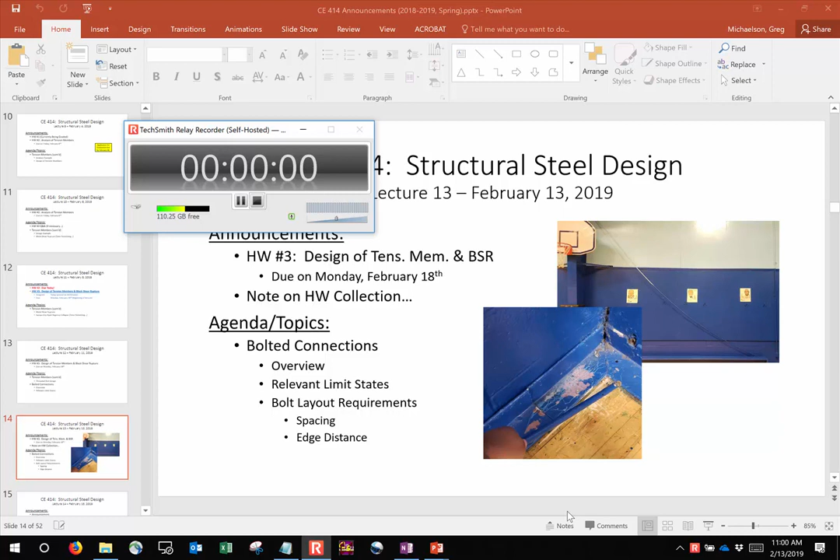All right, let's get started.

I have here some pictures that Mr. Fitzpatrick provided me. This is a threaded tension rod that is in a community center installation, and that is a pretty deflected rod. Because, I mean, just look at it. It's sort of, you know, that's me tracing it. Also, that's its connection. That's pretty interesting. No, that's the floor. Don't do that. That's all I'm saying.

In all seriousness, though, we were talking about it for this installation. It's actually probably fine because now that the structure's up, the concrete wall is probably taking a lot of that lateral load. But somebody should look at it. But yeah, I just figured you'd get a kick out of that.

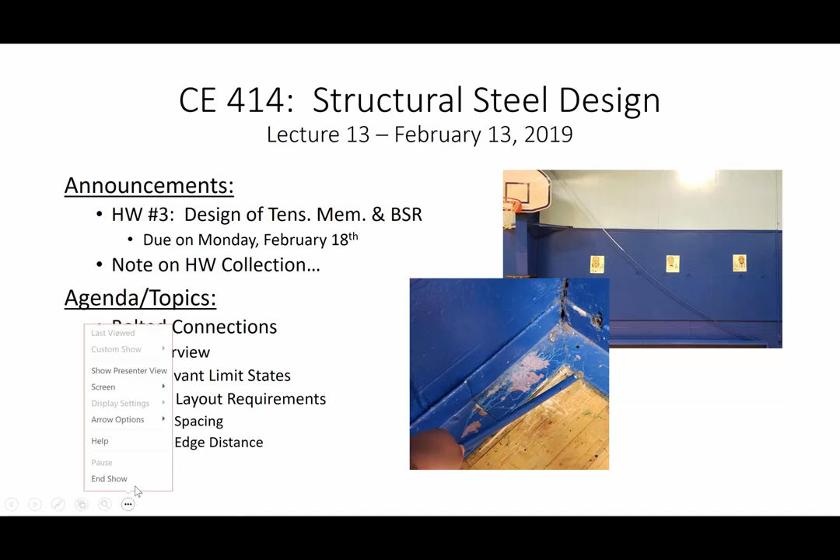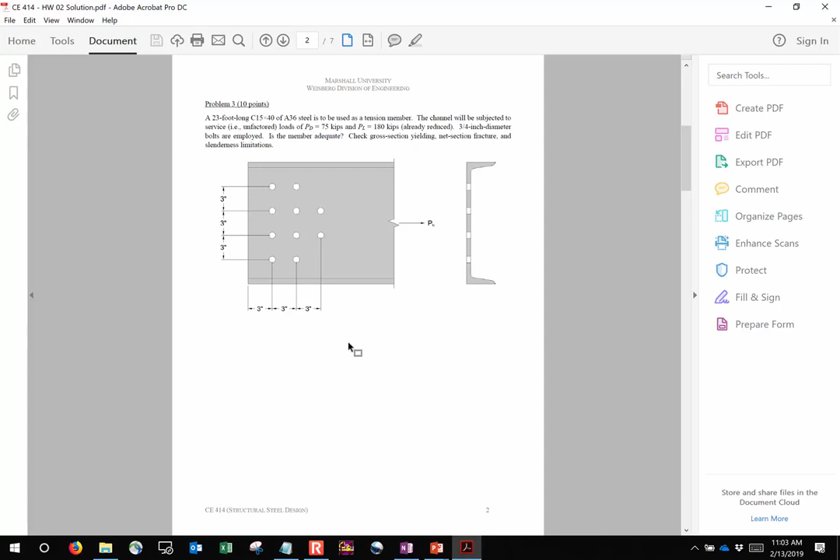I do have a couple things I wanted to mention on the assignment. All in all, I think y'all did pretty well, but a couple things are worth mentioning. Let's take, for instance, problem number 3. This is problem number 3, and we have a series of bolts in this channel. Let me ask you a question. Are they going through the flange, or are they going through the web? When you compute your net area, it's the web thickness, not the flange thickness, because the bolts are going through the web.

The reason I'm saying this is because there are going to be instances where the bolts are connected in a different fashion, where it's different, okay? What I don't want you to do is get into this mode of, this is what Dr. Michaelson did on example 2B. If I do this exact same thing on the homework assignment, I'll get 100, okay? I'm just doing that to help you all out, I'm not trying to be a jerk or anything. I know this is the first time you've seen a lot of this stuff. I just want to make sure you're paying attention to this stuff, okay? This is just a for instance. Like I said, by and large, you all did great. I just wanted to point out stuff like that, okay?

Because I know in this class, it's really easy to go, oh, the net area is this minus 4 DHTF. But it's not TF, because they're not going through the flange, they're going through the web. So everybody okay with that? That's just an instance. I have the solution posted. I'll have the hard copies on the cart outside my office after class. You all can grab them at your convenience. Sound good? Any questions?

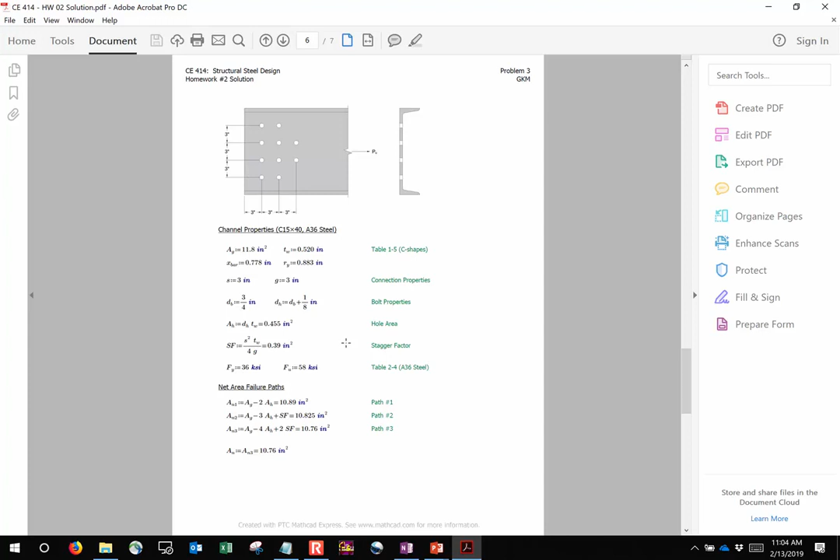Now, keep in mind, in lecture we're in exam 2 mode. We're talking about bolted connections. So I'm going to get back into it.

Last time we concluded our discussion on threaded rods and started talking about bolted connections. We're taking it a limit state at a time, and we're also going to look at bolt spacing and layout requirements here in a little bit. And if we have time, we might get into our first bolted connection example.

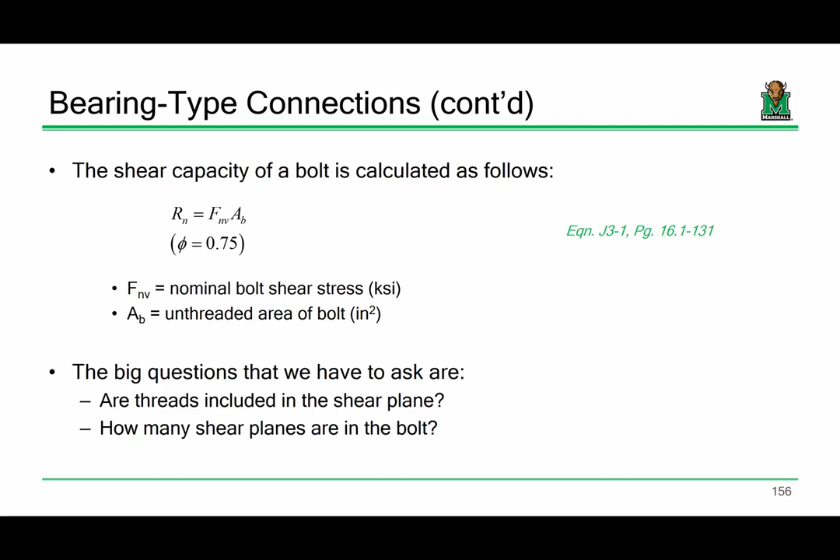We left last time by discussing the concept of bolt shear, the idea of a bolt essentially shearing in half. Our governing equation is just the nominal shear capacity times the area, with a phi value of 0.75. Fortunately, we don't really have to use this equation much because we have table 7.1. But I wanted to recap this and discuss the two primary issues to make sure everybody's clear.

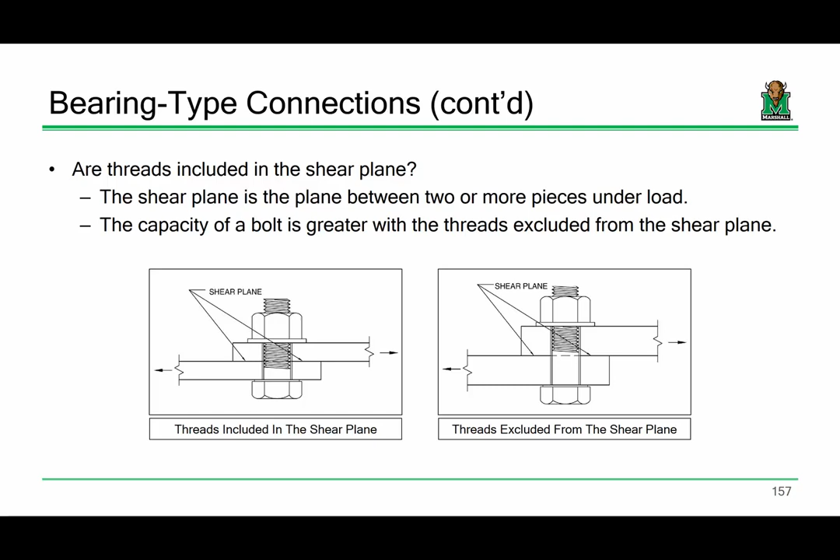The two primary issues associated with determining the shear capacity of a bolt: number one, whether or not the threads are included in the shear plane. If you don't know, what do you assume? That they are included. Obviously, if you're shearing through the threads, you're shearing through less bolt, so the bolt capacity is going to be lowered. When in doubt, make a conservative assumption, and the nominal shear capacities reflect that accordingly.

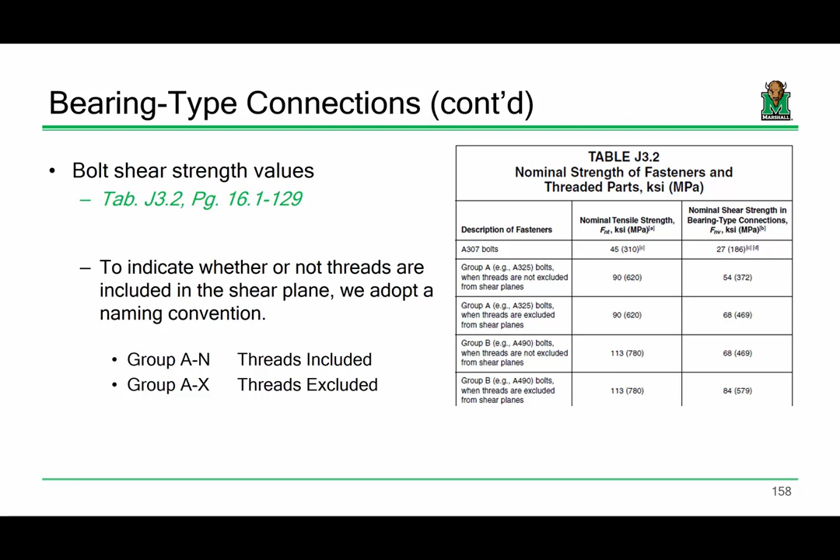Don't forget the naming convention. If I say group A-N, that means threads included. Group A-X means threads excluded. The second thing we have to ask is whether or not the connection is in a single shear or double shear scenario.

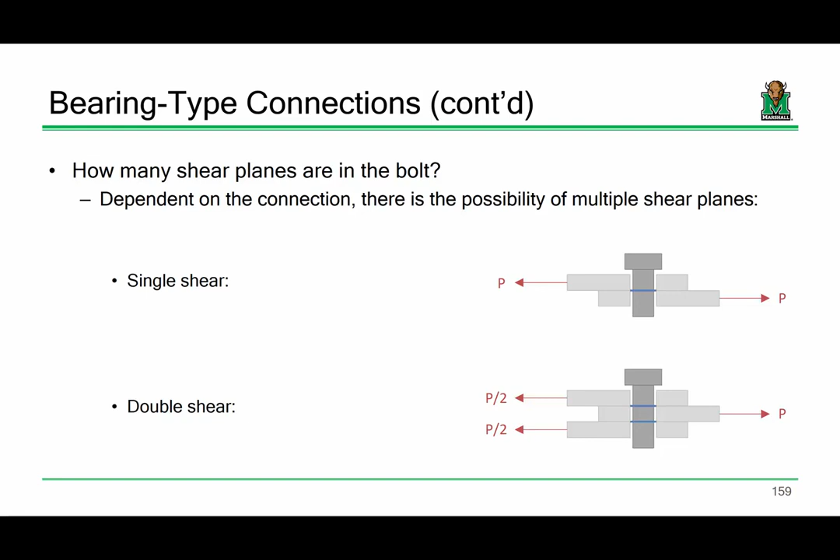If it's in double shear, the bolt is twice as strong, not because the bolt magically got stronger, but because you have to shear through more bolt in order to fail it. So anytime you look at a double shear capacity, the capacity is double that of single shear.

And like I said, we don't have to do a lot of this math because table 7.1 does it for us. So table 7.1 reports bolt shear capacities for single shear and double shear scenarios, for threads included and threads excluded scenarios, for group A and group B, and for various bolt diameters that we're interested in. It does report in ASD and LRFD, but we're not utilizing ASD, so we're only using the blue numbers.

Another thing worth pointing out: if you turn the page in that section of the manual, there are a number of design aids that are pretty useful. For instance, the next page reports slip capacity, which we're going to look at a little bit later. The page on the right reports tensile capacity of bolts. You'll notice that table is a bit smaller because whether the shear planes are there, single or double shear, threads included or excluded, doesn't matter since we're not applying shear, we're applying tension. So all that matters is really the diameter. Pretty simple.

Everybody good? All right, now this is where we left off last time, so I want to elaborate on this topic a little bit. Last time we were looking at failure of the bolt. Now let's look at the failure of the plate.

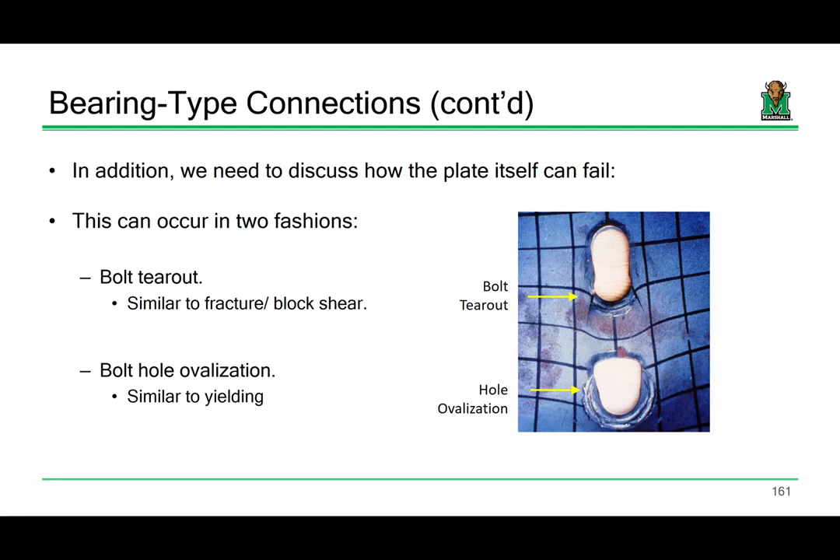Now I'll go ahead and forewarn you, there are different LsubC values whether you're looking at a bolt on the edge of the plate or a bolt within the interior of the connection. Because of that, you're going to have a different nominal capacity for edge bolts than for interior bolts. So you have to do this calculation twice, and then you sum up the capacities to get the total Rn for your connection.

Now phi is 0.75. If you look this equation up in the spec, there are different expressions depending on whether or not you're considering deformation at the service load. We are going to consider that to be important, because to be honest, I really think it's important to ensure that your connection geometry remains consistent. Unless otherwise noted, any structural engineer is going to do that as well.

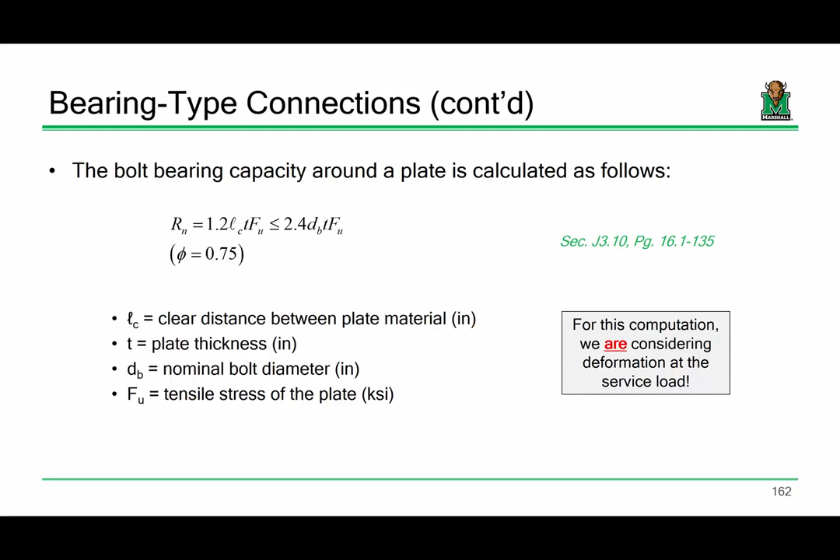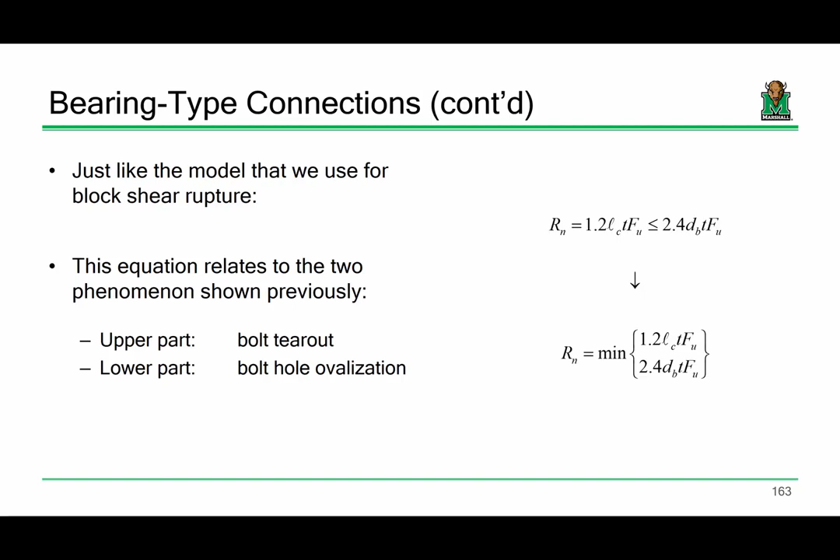Everybody good? All right, like I said, we can write that as the minimum of these two expressions, and it's kind of nice the way the equation is written, because basically this pile is less than or equal to this other pile, where it's the minimum of those two values. Each of those two expressions refers to a given effect. So that 1.2 LctFu is the one that relates to the tear out, to the edges of the plate ripping. And the 2.4 dbtFu, that's the ovalization, the plastification of the bolt hole. So each equation relates to that particular effect, and the minimum one governs. It's saying whichever one's going to happen first is going to be the governing capacity of that given bolt. So everybody good? All right.

Now, the term that's new, the term that's unique, is this term LsubC. I haven't really talked about LsubC yet, so I want to take some time and define it. LsubC is defined as the clear distance between the edge of one bolt hole and either the edge of the other bolt hole or the edge of the plate. This image describes it pretty well. I have a bolted connection with two bolts in it, just for simplification, and a tensile load applied upward. The bolts are going to be bearing on this end, so we're talking about the plate failing in this direction.

So LsubC, if you want a simple definition, is a clear distance, a distance from edge to edge. I'm going to introduce a couple of terms. This term S is the bolt spacing. I'm using the same terminology that we use for stagger factors. Remember, S was along the direction of loading, from center of bolt to center of bolt. And L sub e, this is a new term, is the edge distance. This is from that last bolt towards the edge of the plate to the clear edge. Everybody good?

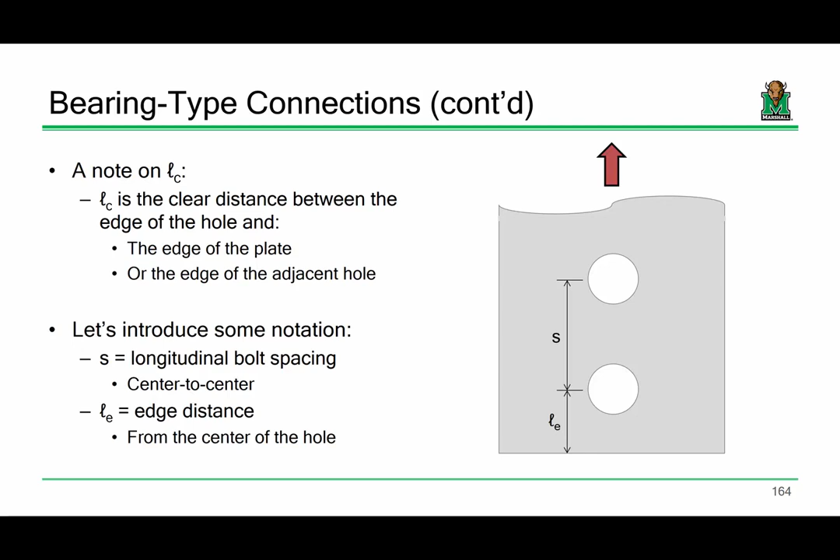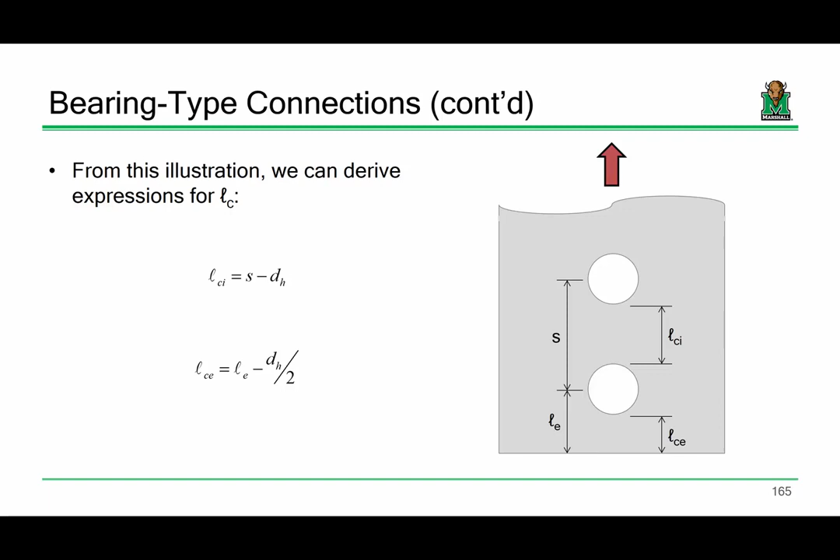Okay. Now we're talking about clear distance. If those are the spacing and the edge distance, these are the LsubC values. Because of your connection geometry, you're going to have two different LsubC values: one for your interior bolts and one for your edge bolts. This bolt is going to want to fail down here, so this is the clear edge distance that we're after. And this bolt is going to want to rip down this way, so this is the clear distance that we're after. For the bolts on that far edge, the LsubC value, which I'm calling LsubCe, is the edge distance minus half a hole diameter. For the interior bolts, it's the bolt spacing, then we come in half a hole diameter and another half a hole diameter, so a single hole diameter. So we have S minus d_h for the interior bolts, and for the edge bolts, it's the edge distance minus half a hole diameter. Everybody okay with that? Any questions?

All right. Now, if you can understand that, I think the computation of the capacity is pretty easy. Like I said, that first equation relates to bolt tear out. If you look at the expression, it's pretty easy to derive. This first expression, 1.2 LctFu, is kind of like a mini block shear check. If you were to think about this in block shear terms, what would be the area along this section? Well, it'd be the length times the thickness, right?

And in order to get a capacity, that's the area, so we would multiply it by some limiting stress, so we'd call it FU, but because it's in shear, we multiply it by 0.6, okay? But here's the thing, there's two of them, because there's one here and there's one there. So we take that whole thing and we multiply it by 2. So that's how you get 1.2 LsubC TFU. So there's really not a whole lot of magic or mystery to that expression. It's just making your life a little easier by doing this sort of mini block shear check, okay?

Everybody okay with that? Now, this one you can't derive. That's just empirical, okay? That's just monitoring, doing testing and figuring out a simple value that fits the test data. So there's no really super way you can derive that, or super accurate way, I should say. Everybody good?

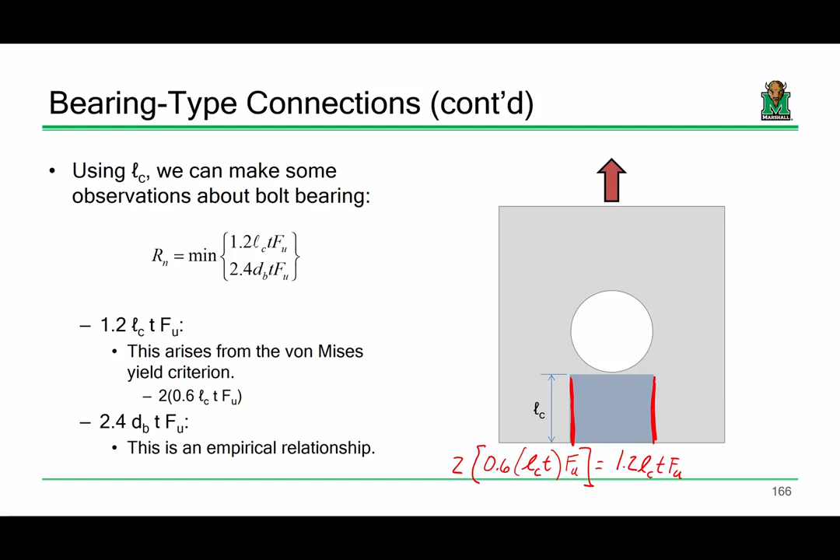So if you look at this expression, notice how there are some terms that are common. So one of the things I can do is factor these out. I can factor out the T and the FU, and I can actually factor out a 1.2 and make this expression a whole lot more user-friendly. I am sorry for another note on this slide, because you're not going to like me very much. Here's the thing. When we do bolt bearing computations, we are actually evaluating the physical dimensions of the hole. We're actually looking at the hole as it is and computing its capacity.

Let's go back to tension members. How do you determine the diameter of the hole? You add 1/8 of an inch, but why do you add 1/8 of an inch? We added a 1/16 twice, right? Now why did we add, let's pop quiz. Give me the reasons why we added those 16ths. There were 2 reasons. We added 1/16 for one reason and 1/16 for another. Okay, so one of them was erection tolerance. So you actually had to drill the hole a little bit larger to fit the bolt in. What was the other one?

But let's talk about that damaged material check. What we were saying is that little bit of ring of material, how effective is it in transferring stress to the entire member? Okay? All right? So that was sort of an analytical add-on that we did for the tension member evaluation. We're not looking at tension members right now. We're looking at the physical dimensions of the hole. So when you're doing a bolted connection bolt bearing check, you don't add 1/8 of an inch. You add a 1/16 of an inch. So, like I said, I hope you don't hate me too much, but that's just steel design. So, any questions on that? Again, we're actually evaluating the physical dimensions of the hole, and the actual hole is a 1/16 of an inch larger, not 1/8.

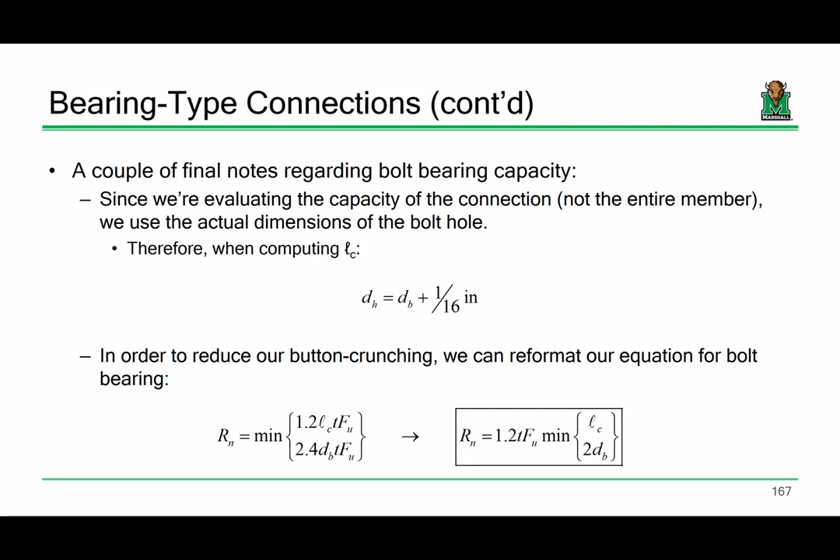Before we start getting into example mode and capacity mode, we got another big question that we need to answer. And I got this question, I think, a few lectures ago, and I said, we'll get to it. Well, now we've gotten to it. And the question was, why are the bolts spaced at 4 inches? Why aren't they 3? Why aren't they 2? How do you figure out how far the bolts are from each other or from the edge? That's what we're going to do now.

So one of the things that you need to be able to determine when you're designing a connection, I think it's pretty easy to determine the required number of bolts. You got 100 kips on a connection. Each bolt can hold up 20 kips. How many bolts do you need? 5, right? Just 100 over 20. That's pretty easy. But what we haven't answered yet is, okay, you got 5 bolts. What do you do, just put them wherever? Now, how do you lay them out? How do you properly detail a connection?

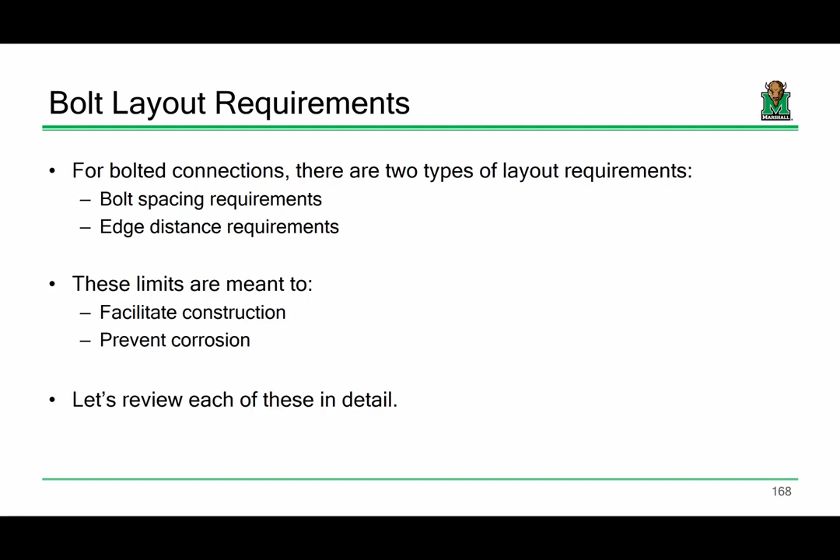And so what we really have to address are 2 requirements. We have to address bolt spacing requirements, how far apart bolts should be spaced from each other, and edge distance requirements, how far bolts can be from the edge. Now, if you want the general reason why these limits are even there in the first place, there's 2 reasons. One, they're meant to facilitate construction and to prevent corrosion. And that'll become clear here in a second. So let's take each of these one at a time.

So first off, we should be looking through Chapter J. So I want everybody to grab this lovely steel manual. Let's go to Chapter J. We're on 16.1-130. Has everybody brought their AISC Steel Construction Manual, 15th edition, the one with the turquoise blue cover, right?

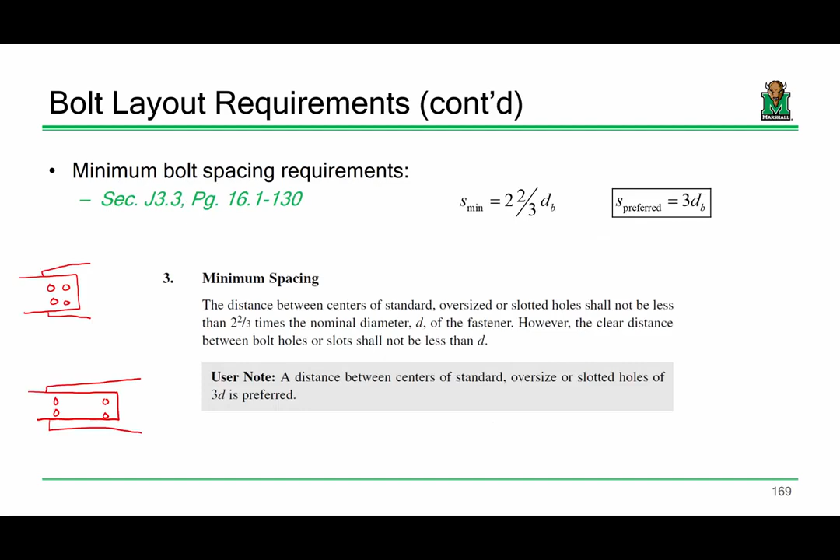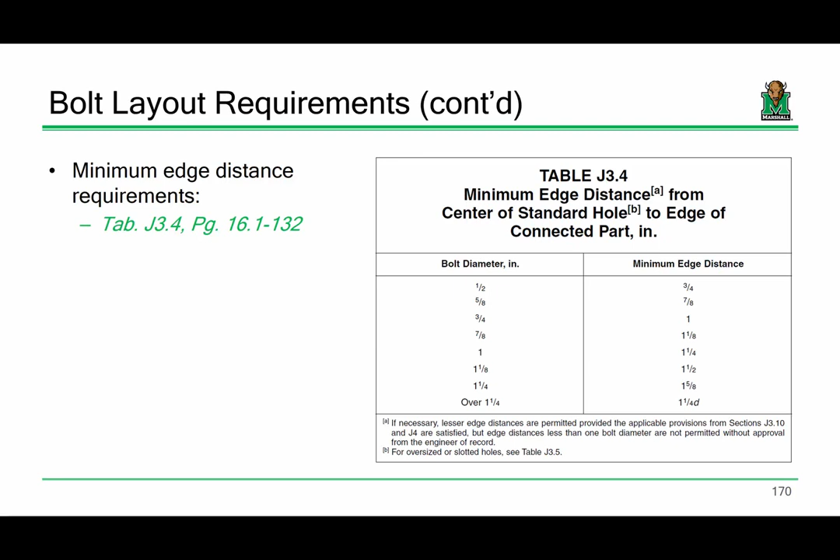And so this is a lookup. This would be the minimum spacing requirement, and this is the minimum edge distance requirement—how far the bolts are from the edge. Again, this is independent of the loading direction. It doesn't matter, we're not talking about loading at this point, we're just talking about fabrication. As for maximum spacing and edge distance—for edge distance there's just a single limit: it's either 12 times the thickness or 6 inches. And that's just a corrosion issue.

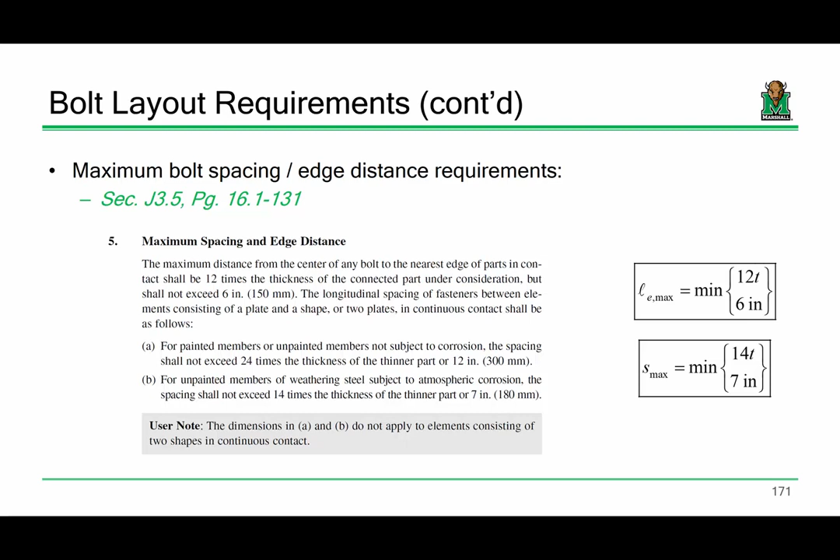However, for spacing, it's a little more refined. The spacing limit on the maximum side is a function of your coating option. So for instance, if you have an unpainted member, the limits are a little more stringent, whereas if you have a painted member, you're allowed a little more flexibility. However, honestly, in most real-world connection applications, if you're connecting member A to member B, that's not an issue—usually you'll be able to detail a connection and not have to worry about S-max. The only time S-max becomes a real big issue is if you have a bolted cover plate on a beam. Then you really are wanting to try and use as few bolts as possible, so you're wanting to space them out. But that's a pretty rare application.

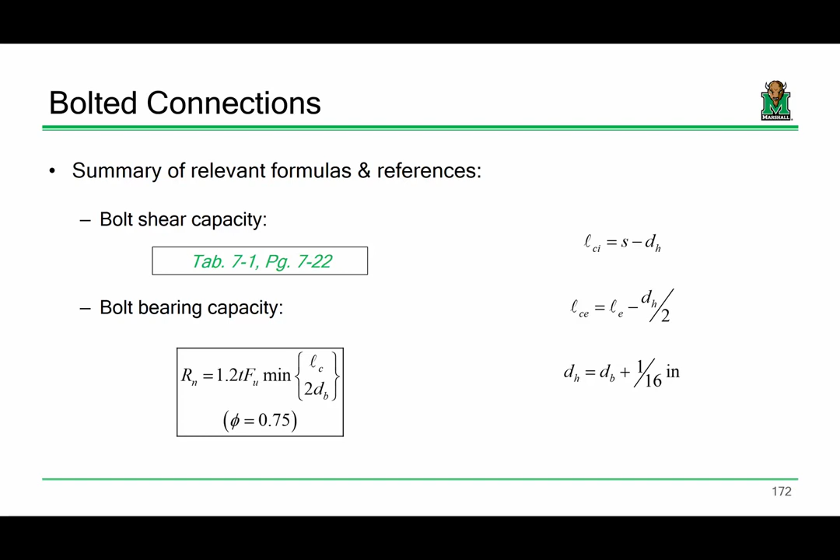And then how do you get the hole diameter? It's the diameter of a bolt plus a 1/16 of an inch, not an eighth. And your phi value is 0.75. As for layouts, we have bolt spacing requirements. We have S min and S preferred. This is S max. If you're evaluating a connection, just use S min and S max because the connection is what it is, so does it meet minimum and maximum requirements? Edge distance, it's just min and max. So pretty straightforward. Any questions?

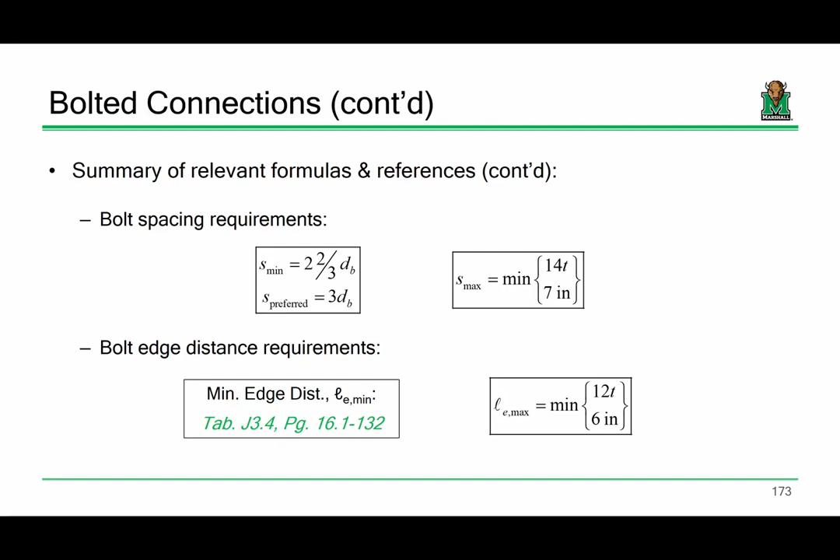That's a good question. I generally just put a tab right in chapter J3 because there's a lot of different tables here worth checking. But that's what I did. It's not totally necessary because you could just write that stuff out on a formula sheet, but I think you should have something there.

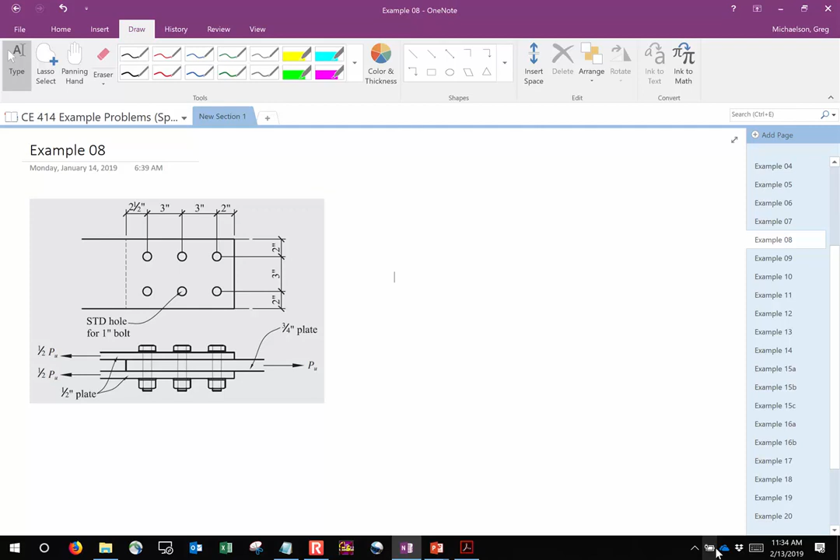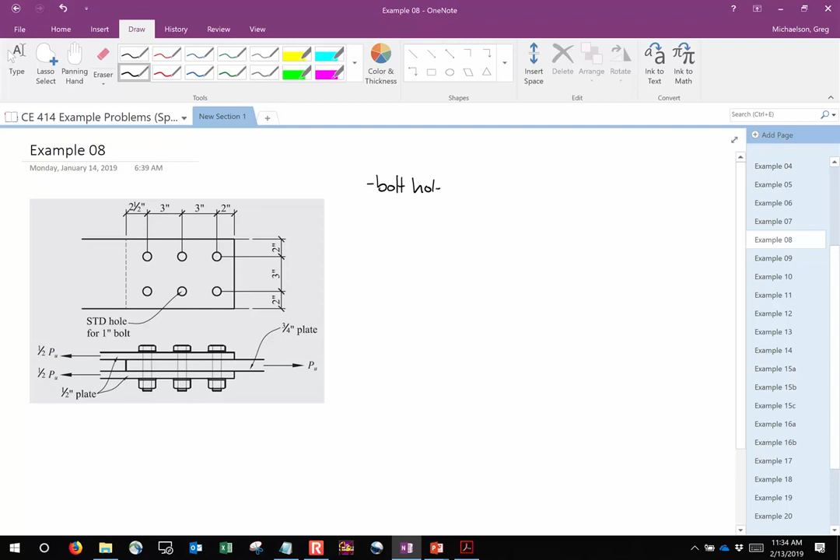All right. So let's compute a couple things right now. So just some standard info. We know that the bolt diameter is what? 1 inch. So that means that the hole diameter is what? 1 1/16. So just go ahead and handle that right now. Now we know that this plate, or that both of these plates are fabricated out of what? A36.

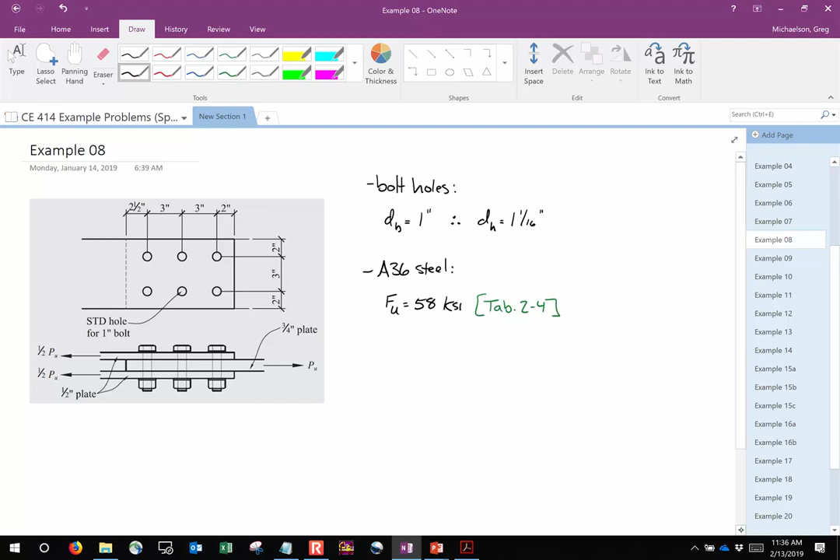So whenever you're doing bolted connection checks, for the most part, you usually only need an F sub U value. Now, I'm curious, without looking it up, anybody remember what this is? It's 58. After a while, a few of these you just kind of memorize. Okay. So the way I'm going to handle this is we're going to keep this simple. Let's handle bolt shear first.

All right. So I told you it was group A X bolts. The diameter of the bolt was 1 inch. And you tell me what's going on with the shear situation. Somebody else, somebody over here. All right, I'll walk through. Is it single shear or is it double shear? There we go. So with this information, I want you to tell me what that is. What is phi R n for a bolt? For a single bolt. 80.1.

Now what table is that? Now, I want to make sure that everybody else can find that. So I'm going to wait for a second. I want to see everybody find that on their own. I see a few folks still haven't gotten there. Those tabs are starting to get pretty valuable, aren't they? Everybody able to find it? So let me pull this up here. Hold on.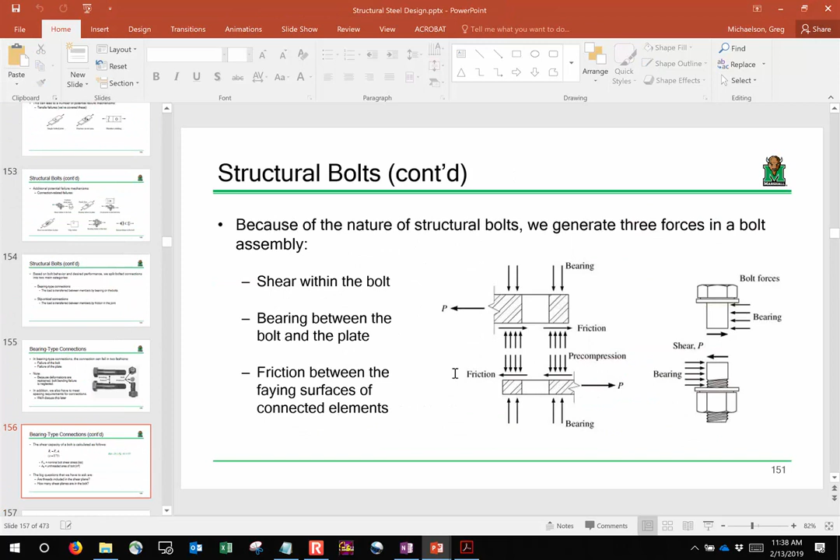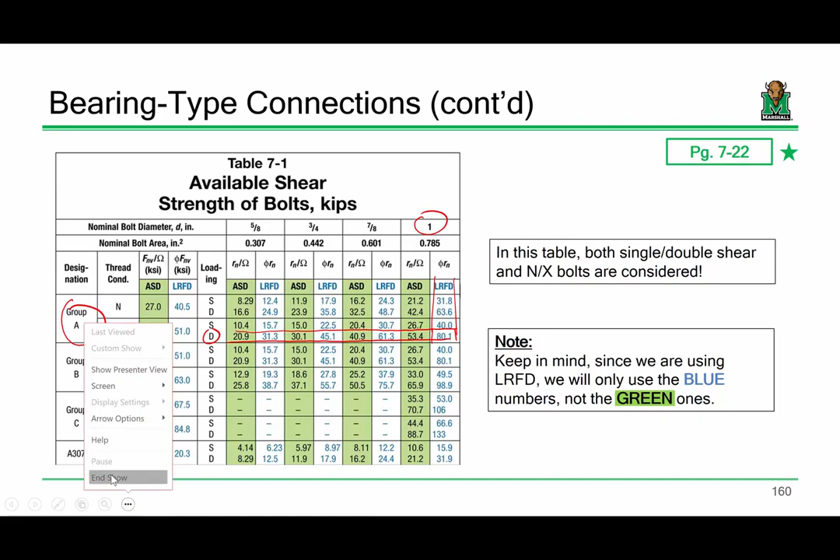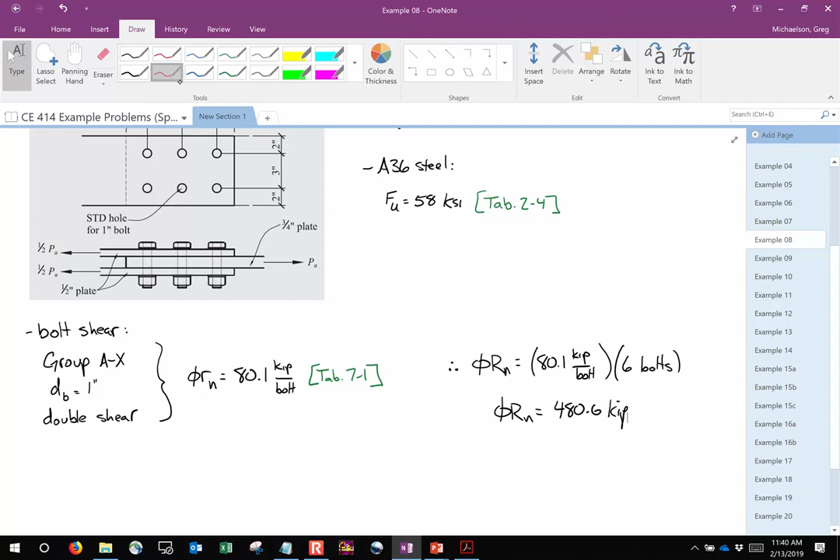So, therefore, what is the actual capacity of the entire connection? What do I do with this number? I promise this isn't a trick question. I mean, what do I do with that number? Multiply by how many bolts you have. And how many bolts are in this connection? 6. 80 kips per bolt, 6 bolts. There you go. I promise this is not a trick question. But in all seriousness, everybody good with this? Any questions? All right. Okay. Now, let's talk about bolt bearing.

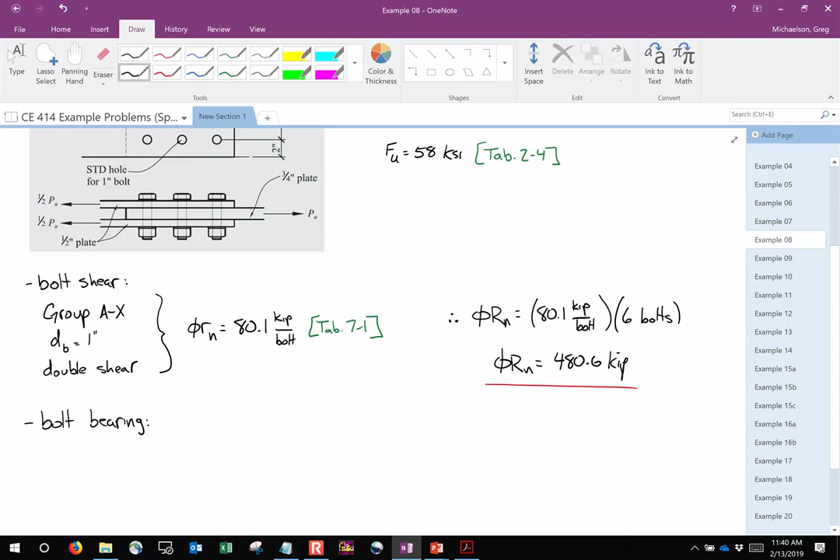Here's the thing with bolt bearing, and you're not going to like this, but it's the facts. Whenever you have a connection, especially a shear connection like this—does everybody see what I mean by shear connection? You got plate A, plate B, and you're loading it, so they're shearing against one another.

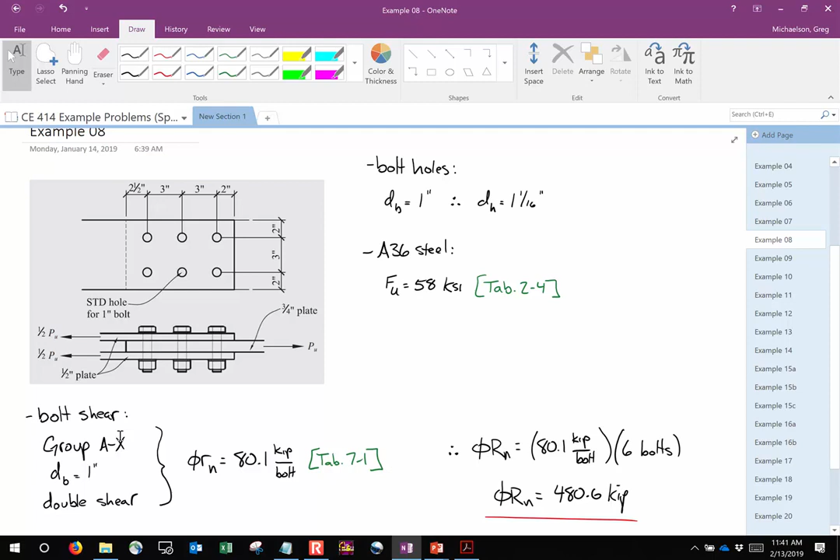Whenever you have a connection like this, you really have effectively, quote unquote, two members. You have the members that are transferring load that way, and then members transferring the load that way, like the hand motions. So really when you do your bolt bearing checks, you have to check both.

So what we're going to do is this: we'll walk you through the center plate computation. Let's look at our connection. What are the plates transferring the load this way? Well, there's just a single 3/4 inch plate transferring load this way. What about the plates transferring load this way? There's two 1/2 inch plates transmitting load this way. So here's sort of what's going on.

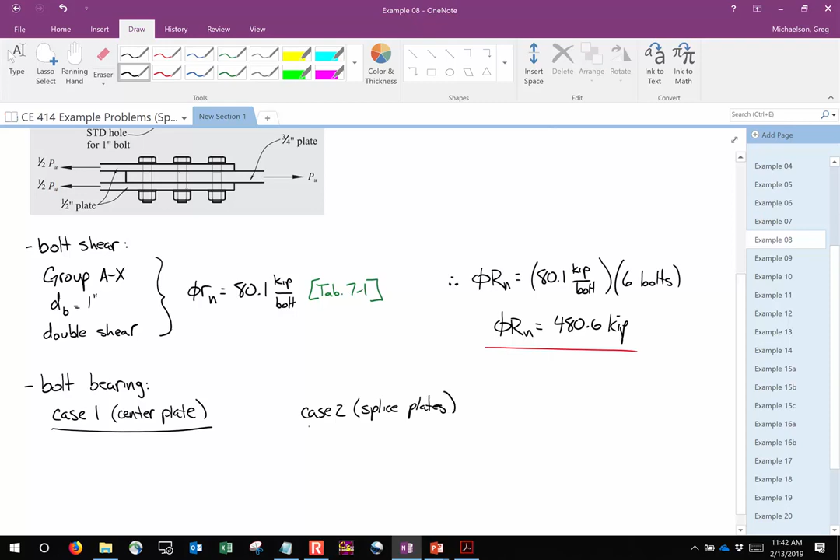I'm going to say there's case 1, which we'll call the center plate. And we've got case 2—we'll call these the splice plates. Now there's a couple different ways of going about this. I'm going to show you what I think is the easiest way in terms of bookkeeping.

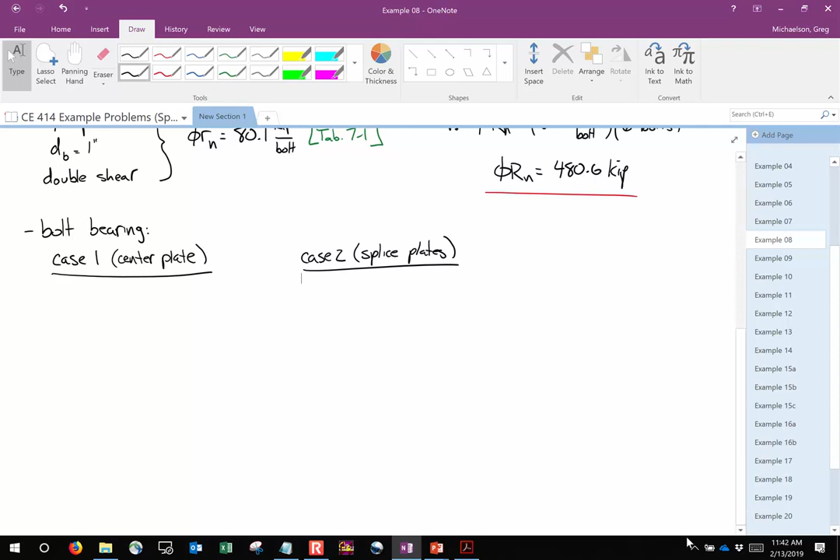Now let's look at the center plate. I'm going to draw out the center plate. It looks kind of something like this. We have 1, 2, 3, 4, 5, 6. Now with the center plate, we're transmitting load this way. So whenever that's the case, the edge bolts are the ones that are on the far end. In other words, when you're yanking on the plate this way, these are the edge bolts, because how is the plate going to want to rip? Well, it's going to want to rip like this, so these are the ones closest to the edge.

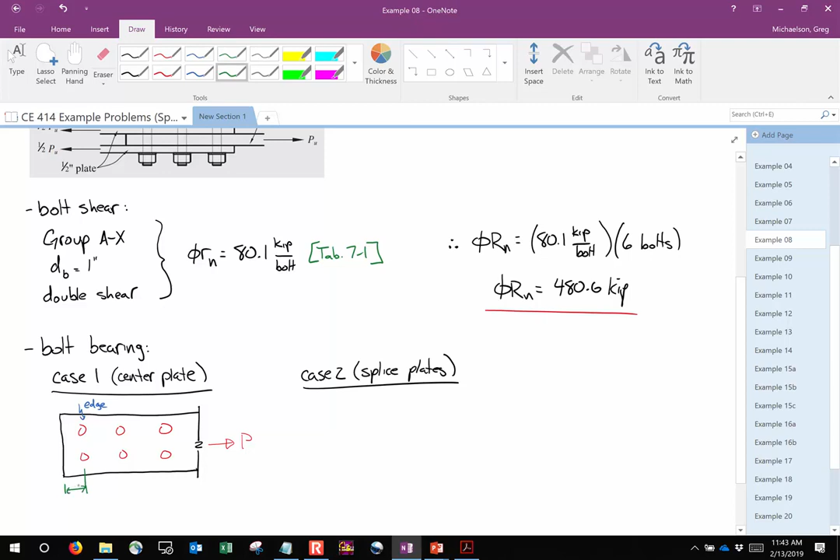So help me out in terms of dimensions. What is this dimension right here? It's 2.5. Look at your schematic—this is the dimension we're after. So this is 2.5, not this one. This is 3. So for this case, I propose that the bolt spacing is 3 inches, the edge distance is 2.5 inches, and the thickness is 3/4. That's what I propose is going on with this case.

So if you're following along, help me out. What do you think the bolt spacing for case 2 is? It's 3—it's the same, right? It's 3 inches. What is the edge distance? 2 inches. Now for the thickness, we have two ways of doing this. We could compute the capacity of a single plate and multiply it by 2 at the end. What I do, I just say that the thickness is that.

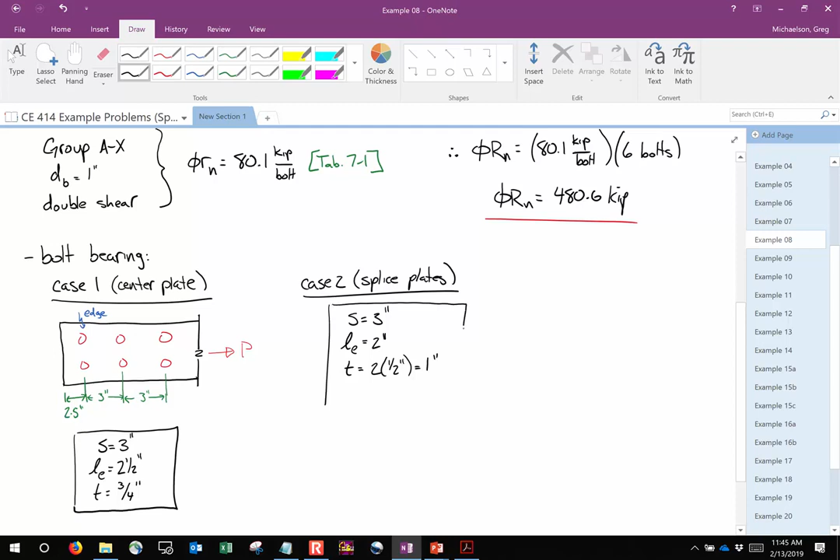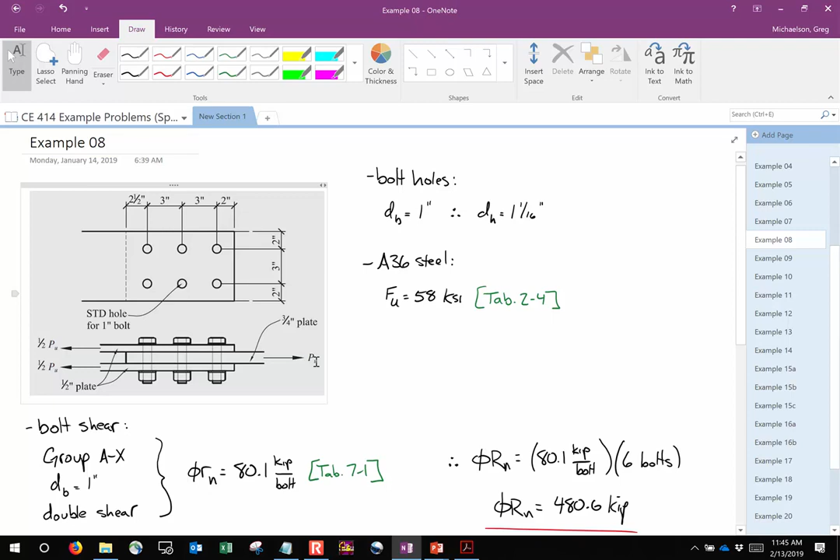We'll take a look. So we're looking at the cover plate, so we're looking at these top plates. This dimension here, that's the 2.5—that's the main plate. But the cover plates, that's a good question. So the cover plates, these are the edge bolts. So how far is it from here to here? It's the 2 inches. Everybody okay with that?

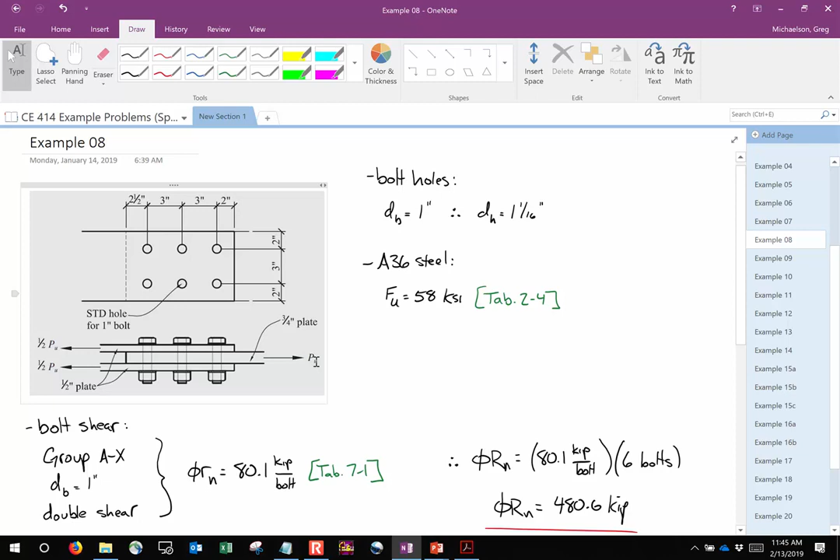Is everybody okay with how I came up with these boxes? Now let's say, I want everybody to pay attention up here. For the sake of discussion, let's say—actually, let me use a thicker one. Let's say, just for the sake of discussion, this is a hypothetical. This isn't the case, but let's say it was. Is there any real reason, if that was the case, to even evaluate case 2? If that was the case, they'd have the same bolt spacing, the same edge distance, but this would have a thinner plate. So is there really any reason to check this one? Which one's going to be the worst case scenario? It's going to be this, right?

So if the edge distances were the same, there'd only be one difference. It'd be pretty easy to look, because they're both made of the same steel, right? It's all the same steel, so all you'd have to do is take one look at it and go, I don't even have to worry about checking case 2. There's no point—I know this is going to govern, so move on. But unfortunately, that's not the case here. We have two different varying dimensions: a different thickness and a different edge distance. So unfortunately, we got to do the bolt bearing calcs for both of them.